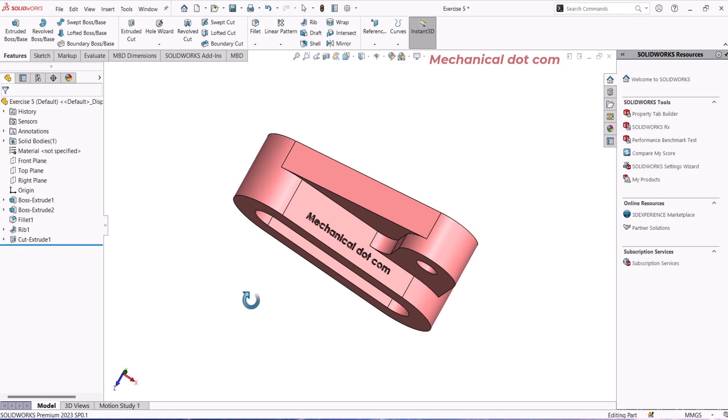In this video, we are going to create this 3D model with the help of its drawing. You will also learn some basic commands like extruded boss base, extruded cut, and the rib command. First of all, let's see its drawing.

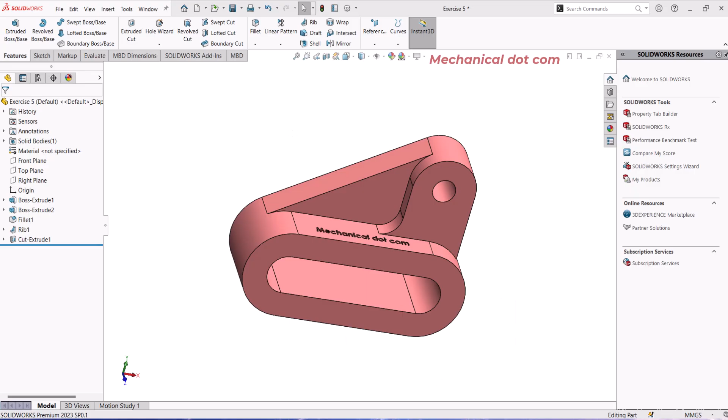Go to SolidWorks, open a new part file. Make sure that the unit system is in mmgs system.

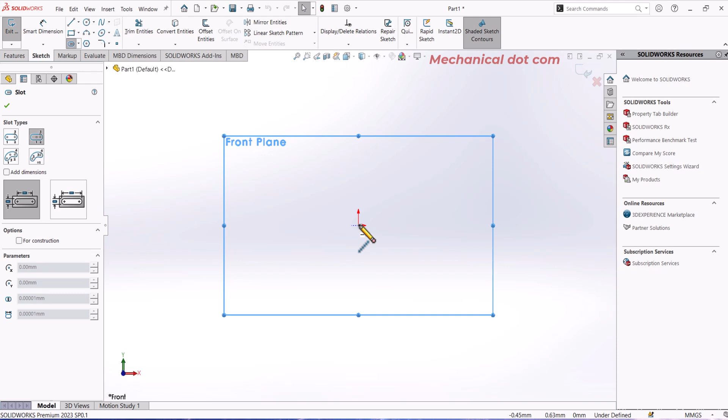Now go to front plane, normal, go to sketch and choose here center point straight slot. From the origin, draw a horizontal line and now drag like this. Also draw another center point straight slot from the same points and drag like this.

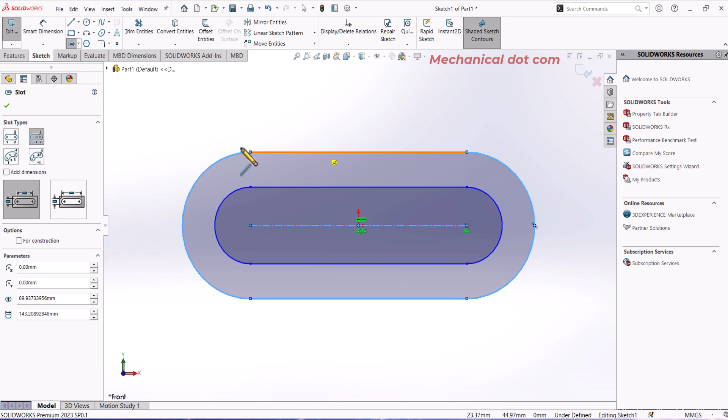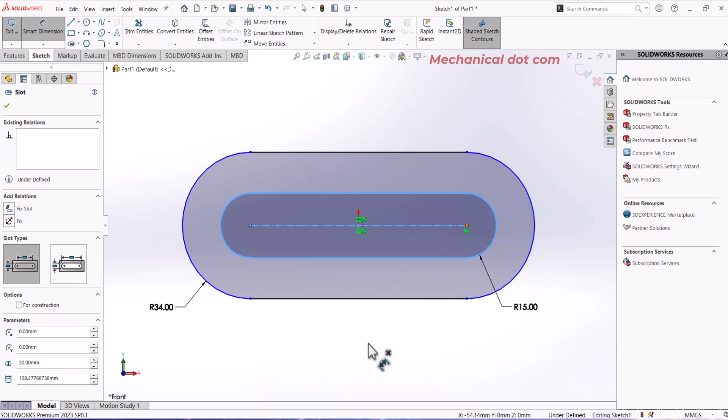Now go to smart dimension. The outer radius is 34 millimeter and the inner radius is 15 millimeter. And from this point to this point, the distance is 108 millimeter.

Now go to features, extruded boss base, choose here blind and type 52 millimeter. Click OK.

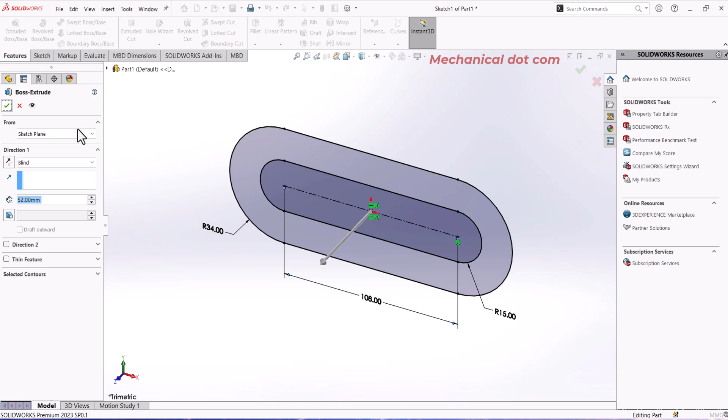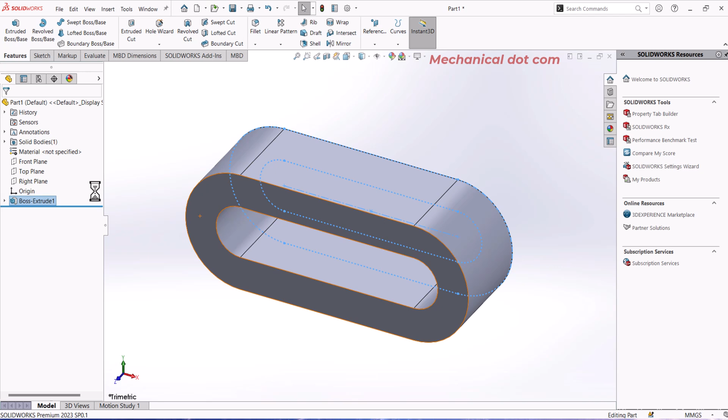Go to front plane, sketch, and line command, and draw lines like this.

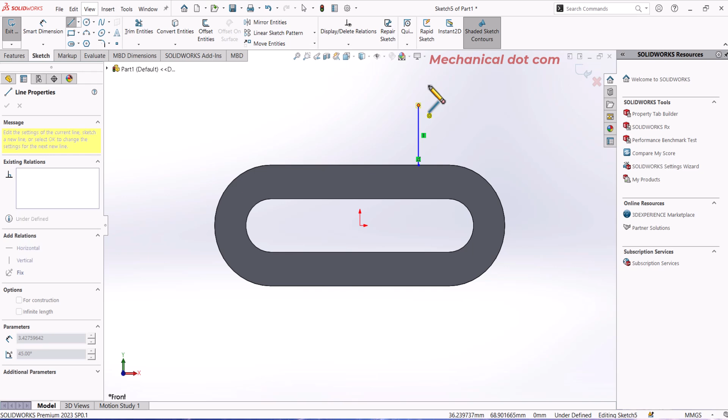Now we want a curve, so come back to this point and this will convert into a curve. Again click, and now a straight line. Escape.

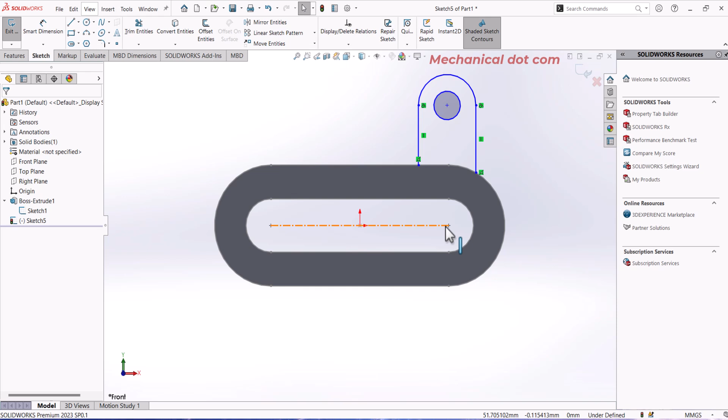Also draw a circle. Now come back to the previous sketch. Click the eye button and this will show. Select this point, press the control key and select this point, and make them vertical. Click OK. Now go to smart dimension.

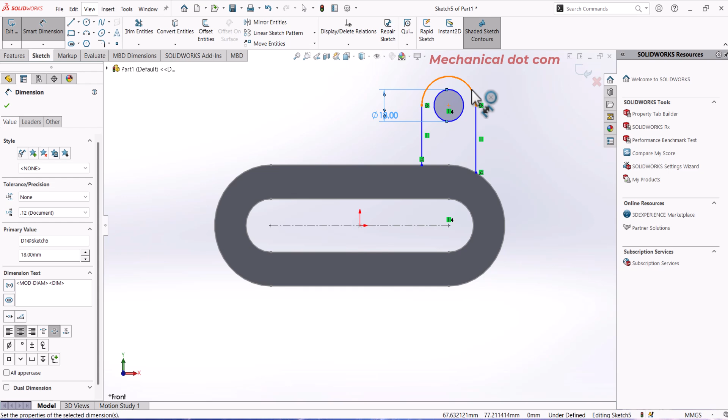The inner circle has a diameter of 18 mm. The outer radius is 25 mm. And the distance from this center to this point is 76 mm. Now click OK.

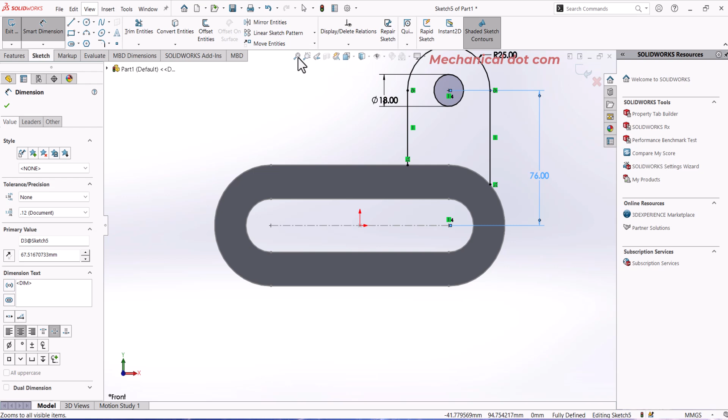Hide this sketch. Now select this curve, convert entities, also this line and convert entities. Go to trim entities and trim the extra part like this. Click OK.

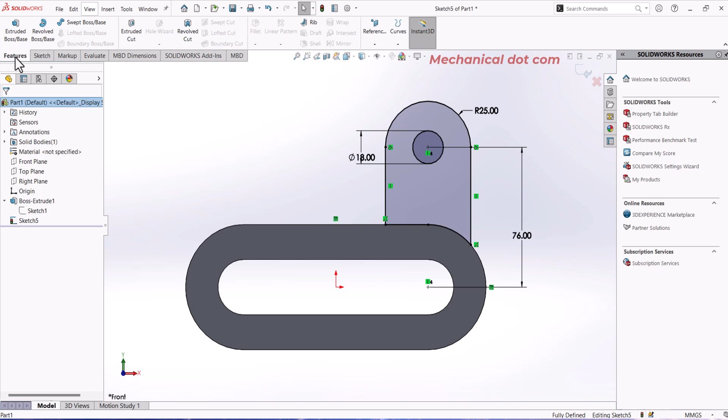Now go to features, extruded boss base, and type here 34 mm. Choose blind and click OK.

Control 7. Now we want to fillet this corner, so select this line, go to fillet and type here 15 mm. Click OK.

Now the last part is the rib. This rib is tangent to both faces and also has a width of 22 mm. So let's draw this part.

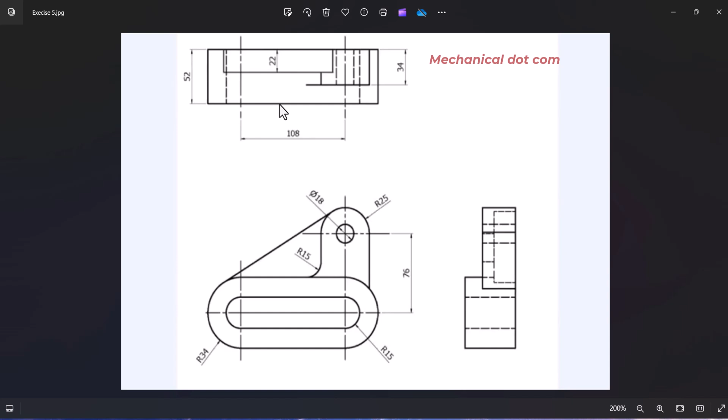Select the back side and sketch. Go to line command and draw lines like this.

Escape. Now select this curve, press the control key and this line, and make them tangent. Also select this curve, press the control key and this line, and make them tangent. Okay.

Now select this point and this curve and make them coincident. Same on the other side. Select this point, press the control key and this curve, and make them coincident. Click OK.

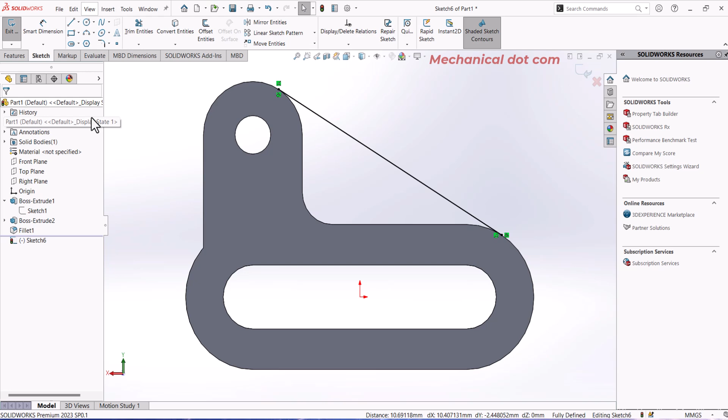Now control 7. Go to features, rib command. See, it is on both sides. We want it on the inner side, so select this, the last part, and type here 22 mm. Click OK.

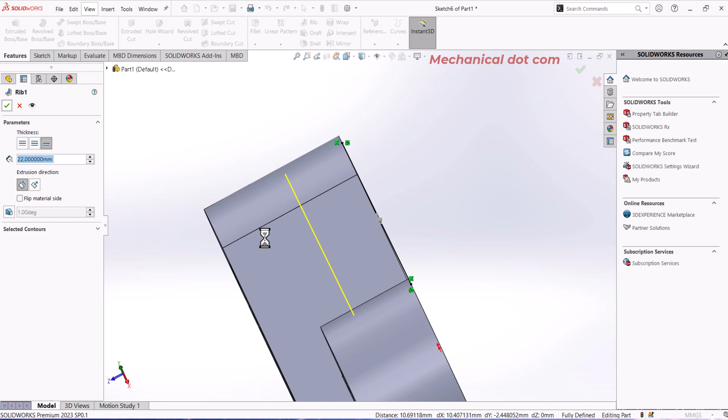Control 7. See, our part is complete. Now for the appearance, select the whole part, go to appearances,

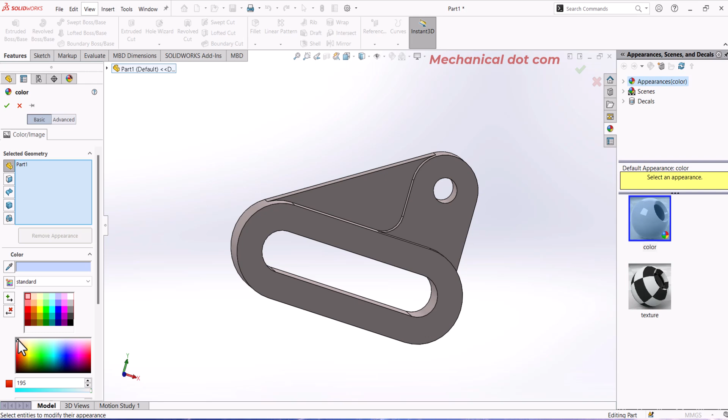and I want some peachy color. This is a little dark. It is okay. Now click OK. Control 7. So this is our final part.